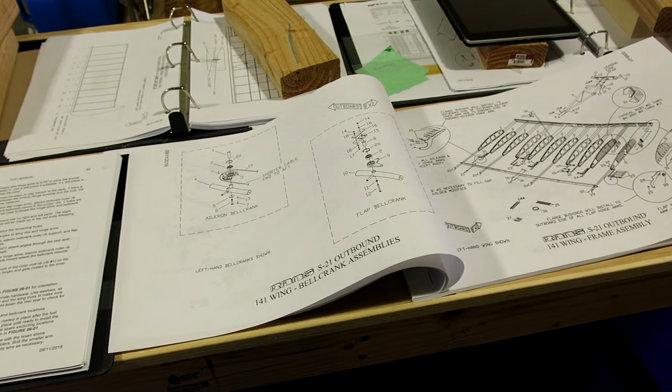It's November 1st. Daylight savings time ended last night, so we're losing an hour of daylight on the back side here this afternoon.

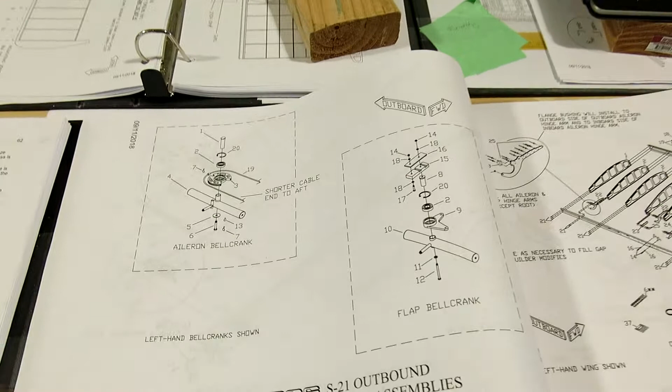We got a bunch of the wing parts primered yesterday, and we're getting those put away. Today we're going to look at maybe getting these bell cranks assembled together, and probably look a little further ahead in the book to see what else might need priming while the weather's nice. That's kind of where we're at, and we'll get going.

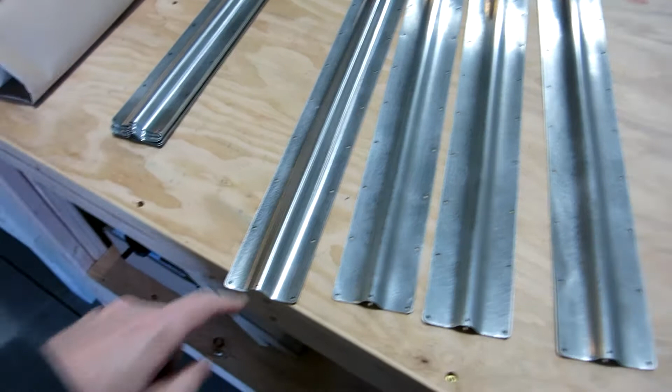Something I forgot to mention last night was we were doing these fuel tank supports, and there's two of them that seemed different from the rest. I measured these out, and they're all 20 thousandths thick, except there's two that are a different size - 16 thou thickness. I don't know if that makes any difference, but it was interesting. I'm not quite sure why there was a design change.

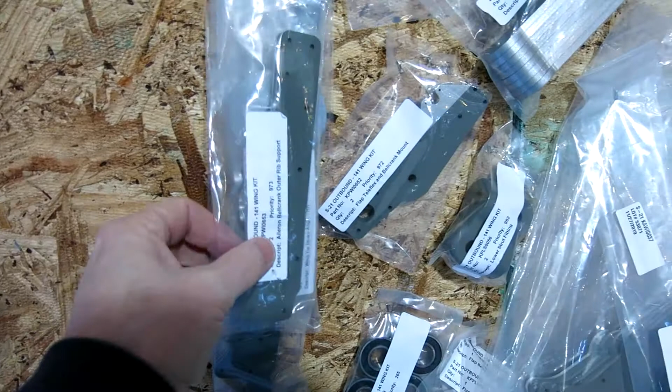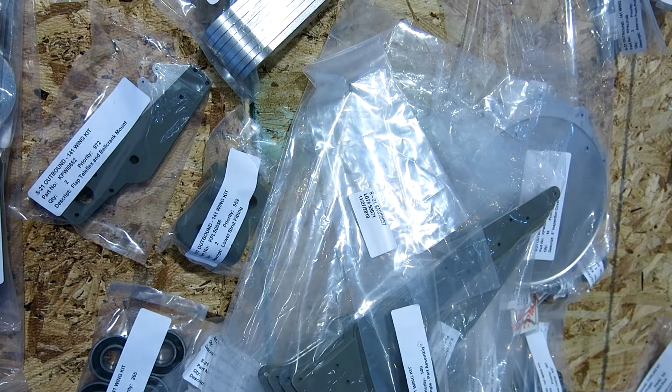Once we get done priming these parts, we hung onto the bags, so we just put them back in the bag so they're ready to go when we need them. We've got these primed - all kinds of stuff primed up, ready to go. We just put them back in the bag with a label on there so we can easily grab those off the board here.

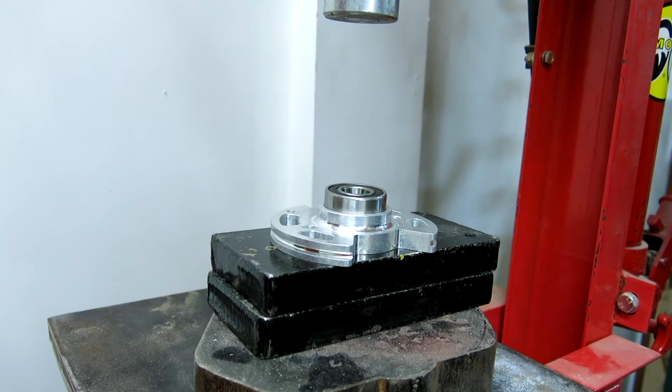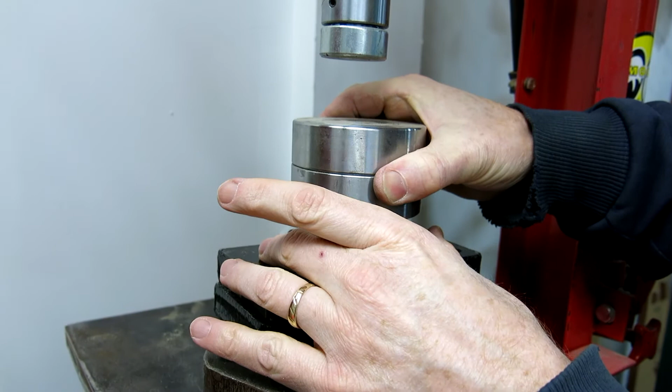One thing you have to do on this is we've got the aileron bell cranks, and we'll also have the flap bell cranks, but this bearing has to be pressed in, and we have to improvise a little bit. We have access to this hydraulic press in another hangar, so we'll put it in like that, and we've got this big dimple die - I just use that as a press piece, and set that on top so it's square. Let's pump this thing down.

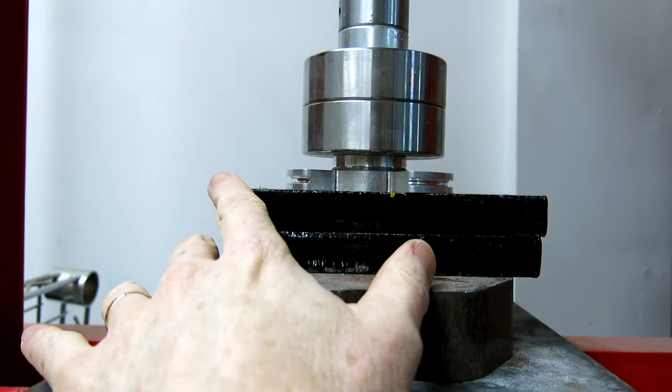Some of the stuff you have to improvise. So we're squared up there, and it just slides right in, if you can see that. So we get it right to there where it's on the edge, and we'll pull this out.

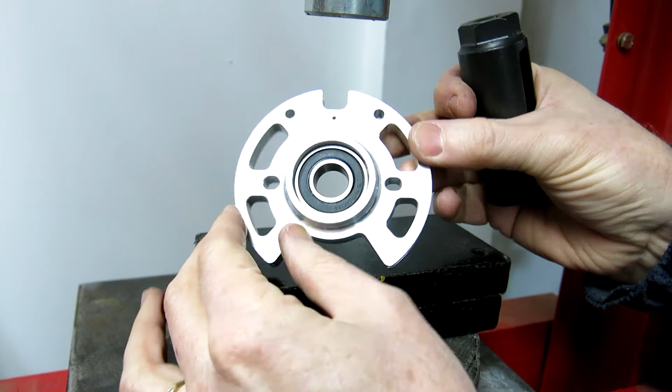I have a socket that is actually an oxygen sensor socket for our Honda, and we'll use that to press it the rest of the way. It fits just inside this bell crank, so it presses on the outside of the bearing and not on the actual bearing itself - the black part, the part that shouldn't be pressed. We'll just go the rest of the way there, and there, it's bottomed out. Take that out, and there we've got a pressed bearing. Looks good, looks straight, rolls nice, so we're good.

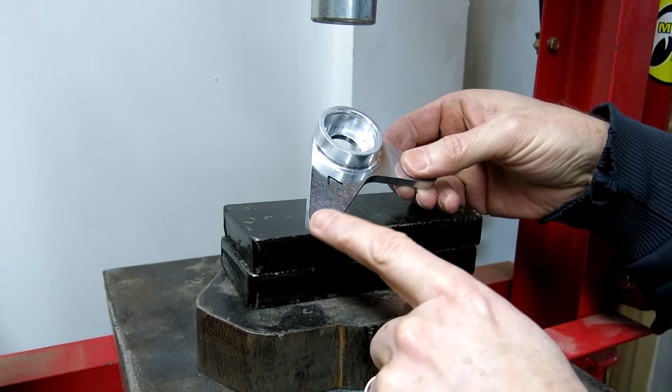Alright, we're pressing the bearings into the bell cranks for the flaps, and one thing we did was, since they have a definite left and right bell crank, after we cleaned this we just marked it with an L and an R on the other one. Same drill as with the aileron bell crank, we'll just set that on there, kind of get it lined up with the press.

I'm just going to use this big old die here to press it in, so I don't have to pump this thing all the way down. This press is set on as high as it will go. There we go, seated there. And I'll take that out.

Grab my handy dandy oxygen sensor socket from the Honda, and just line that up right there. Make sure we're centered up in the press, and a little bit off - there we go. And then press it the rest of the way, right to there.

Looks good, feels good, we're done. Got our bearings pressed into the bell cranks, and the last thing you do on those is put a snap ring in. There's a little retainer ring in there, and you get your snap ring pliers and put those retainer rings in there.

But those came out pretty good using that press. So if you've got access to a hydraulic press, I highly recommend it. Sure makes this stuff a lot easier.

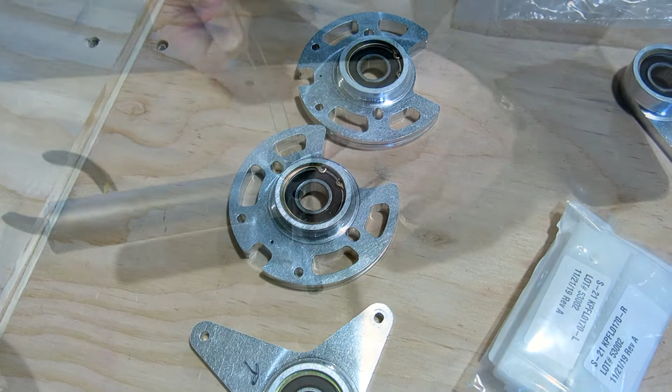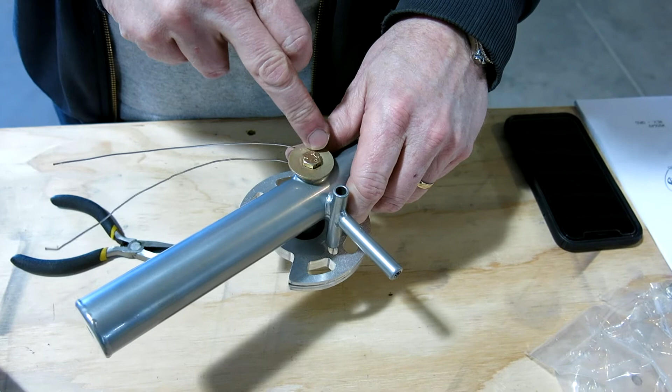So we got our bell crank spindle through with a 1/4-inch bolt. It's got a drilled head in it so we can safety wire it, and then there's 2 holes in this assembly here that are in this part where we safety wire through.

So I'm trying to safety wire this in. I'm kind of not super happy with the way this design is, and maybe I'm just overcomplicating this a bit, but I just want to put a twist in it. But then it has to make this 180-degree turn back around the washer to get through the bolt. Just seems kind of goofy to me that it has to make that turn through there.

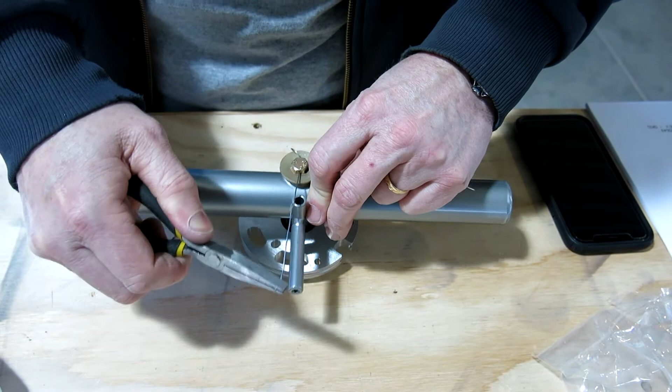Down and around. Yeah, that's just... Well, so we'll put another turn in it here through this way.

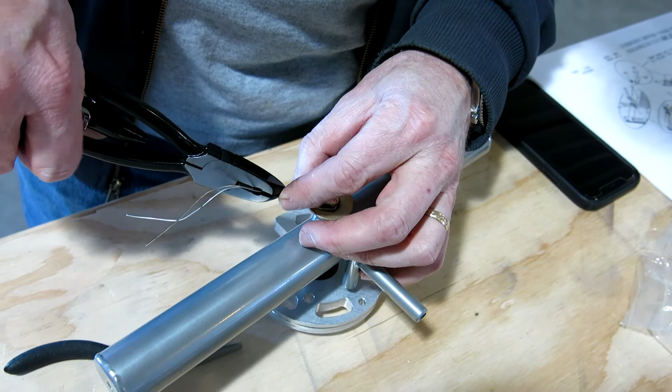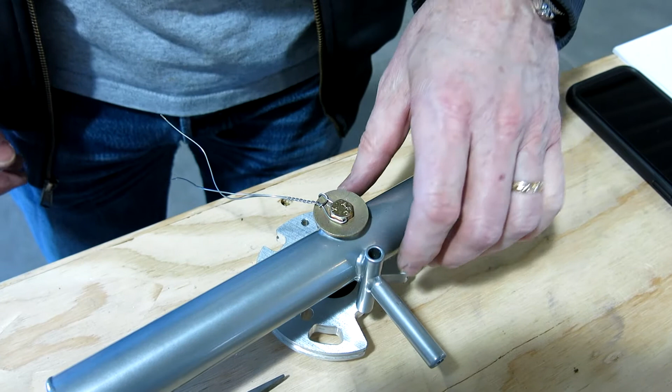Yeah, jeez, that is goofy. That's goofy. I'm not sure how to get this done. I guess I'll be asking the Facebook group on this one. Yeah, I don't like this.

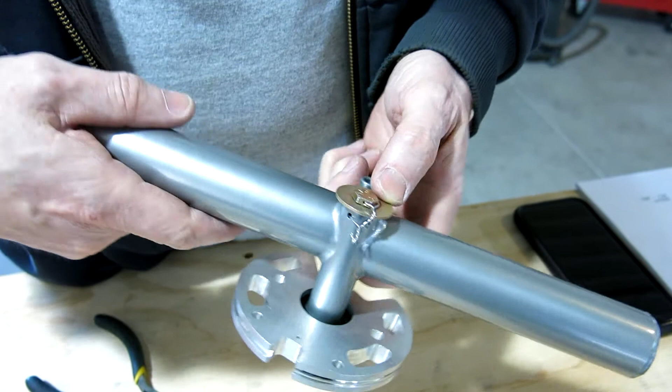Here's what I ended up doing. On the safety wires, I wrapped it around here, brought it around. I still don't like this bend you have to make around here, but then I ran it through here and did it there. So I'm gonna redo this. This is the first one I tried. That's pretty ugly, so I'm gonna see if I can redo this one.

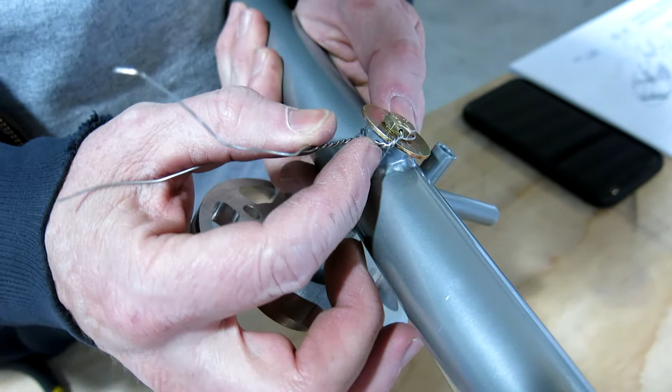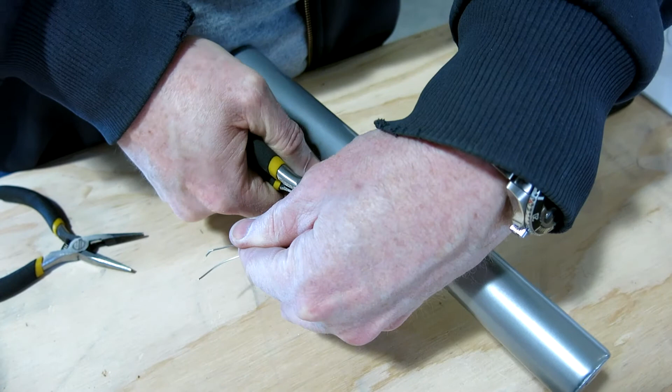Okay, alright, so here's what I ended up doing on this one. Again, I redid this one. I'm still not super impressed with how this came out here, but making this corner and through the holes and then safety wiring it that way. So yeah, if you guys have any suggestions on how you're doing that, maybe like I said, maybe I'm overcomplicating this, but geez, there we go.

But if you got a suggestion that maybe works a little better for you, let me know. Get that curled around there. But yeah, so we'll see. It's not going on the wing right now, so if you guys, like I said, have a suggestion, let me know, and I can come back and redo these.

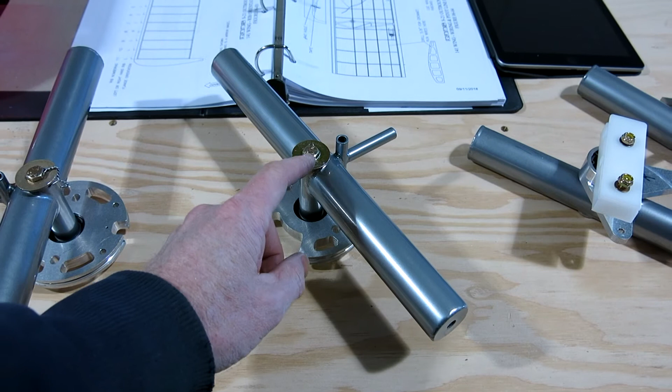We're wrapping up here tonight. Got these bell crank assemblies put together, and you saw in the video safety wiring, pressing the bearings in there. That was pretty much a majority of our time was spent getting those bearings pressed in and ready to go, and then kind of had a battle with this safety wire on these two here.

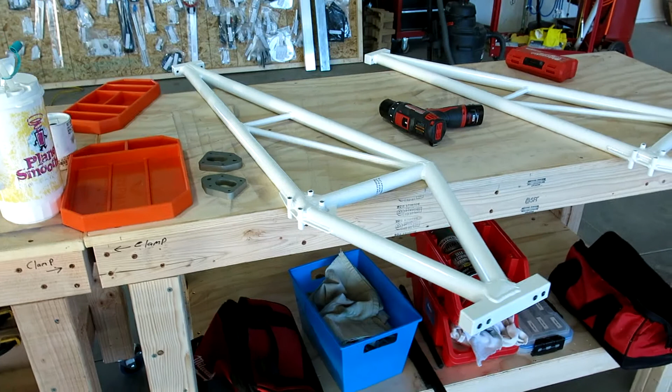But like I said before, let me know. I don't know, I think it's kind of goofy how that has to wrap around that washer. Maybe it's okay, I don't know. It's Loctited in there. There's no torque spec on it because we're going into an aluminum sleeve, but got that safety wire done. So we spent that part of the afternoon getting that stuff done.

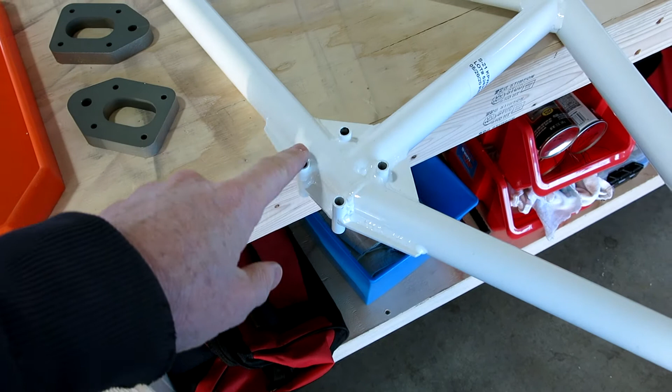Next thing up on the list is the wing trusses, and I've already cleaned these out, cleaned the powder coating out of those, got those ready to go. And next thing is this will go here, it's part of the strut mount. We have to drill these out to a 1/4 inch, bolt it in, and then match drill the rest of these in. I'll get those mounted up, but that's probably going to be tomorrow.

So not a whole lot that, well, I mean, we were up here for quite a while, but not a whole lot that I have to show for it other than these bell crank parts. Yeah, but those did take a while to kind of figure some of the stuff out on that.